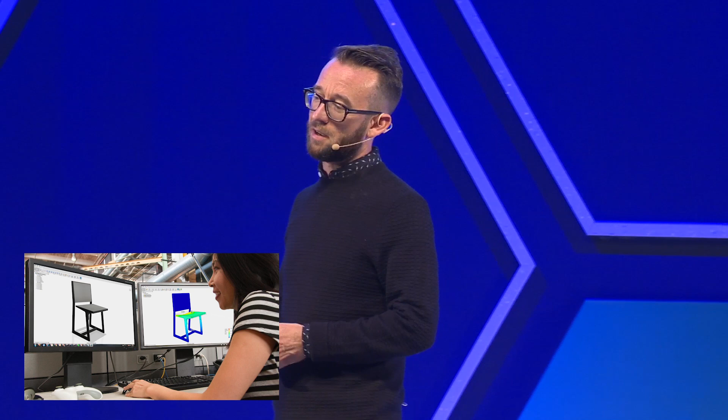Let's start by looking at how our design tools are being transformed by the cloud. When computation was finite, we made tools that you directed. You had to direct the tool. You drew the lines and arcs that described your idea.

You decided when to run simulation on a design to discover its performance. But now computation is abundant, we can flip the whole thing around. No longer simulating based on a design, and not just simulating during design, but simulating to discover the design.

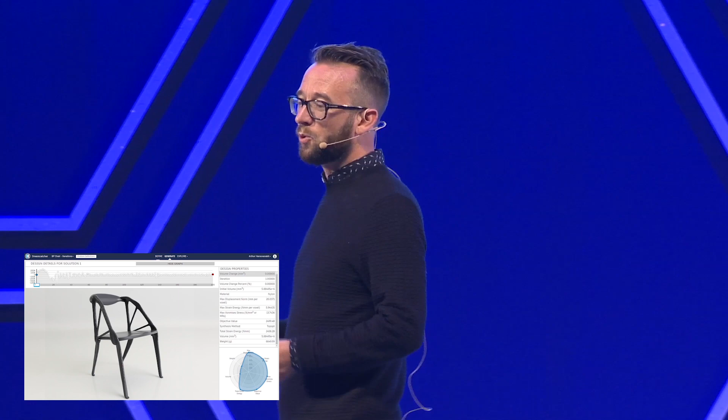With generative design, you just need to describe the problem, the goals and constraints, the forces at play, and the tool helps you discover what's possible. It uses abundant compute power to analyze the entire solution space, discovering designs you would never have come up with.

But generative design is also moving beyond just synthesizing geometry. It's starting to understand something infinitely more complex: the needs of people.

Our team in Toronto has moved into a new building, and so we're using it as a living experiment, an experiment to discover how we could maximize productivity and create a great environment for the people working there.

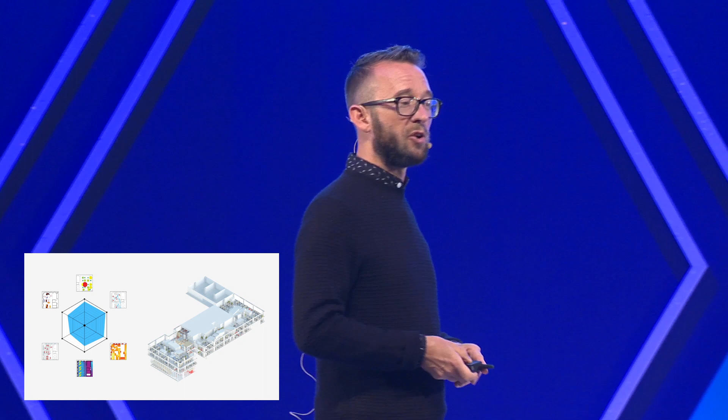So we use generative design, but rather than feeding it the forces affecting an individual part, we fed it the forces influencing human productivity. We surveyed our employees and captured their preferences and work habits.

The system then evaluated that survey data against a set of hard constraints: the boundaries of the building, the fixed locations of the stairwells, and so forth. And then it generated thousands of floor plans.

The system sought to minimize distractions, maximize outside views, prioritize personal relationships, and find an equitable solution to everyone's needs.

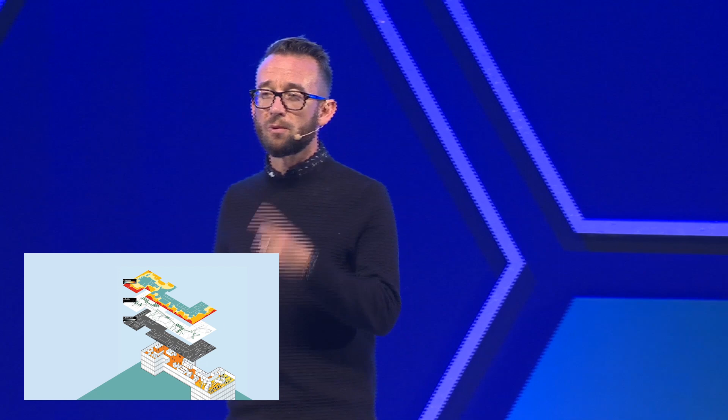We weren't just pushing cubicles around like Lego blocks, and we weren't just stuck with the first idea that worked. Our traditional design tools passively awaited our instruction. The relationship was purely directive.

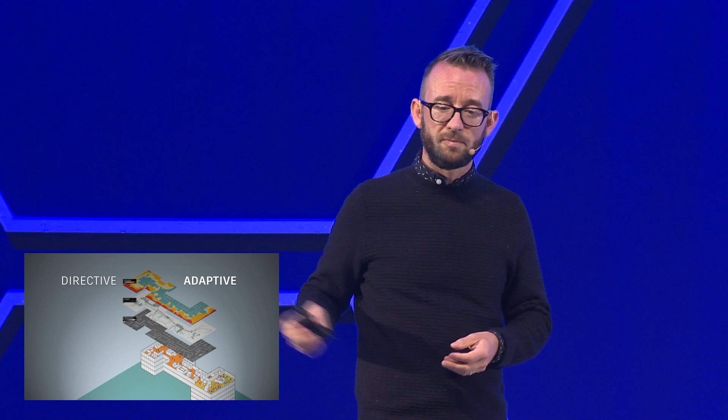We directed the tool. But this relationship has evolved into one that's adaptive. Our generative design tools anticipate our needs, and in doing so, help us discover the best design possible.

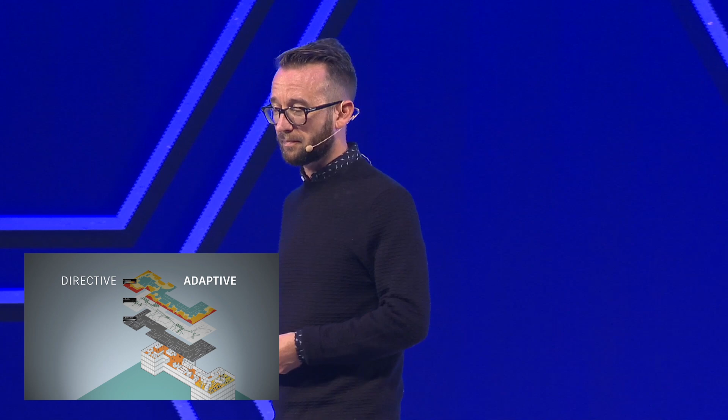And how about creating the things we design? Let's look at how the way we make things is being transformed by abundant compute power.

The physical capability of our robots hasn't changed drastically in decades, and nor has their environment. We still lock up our robots in the same old work cells. We do this to protect ourselves. These things move fast, weigh a ton, and have no way of seeing if we're in the way.

But we also lock down our processes to protect our investment. We all followed the Six Sigma thinking of the 80s, streamlining our manufacturing, making it as lean and efficient as possible. With our processes rigidly locked down, we balance the economic equation with volume.

But we can flip this equation on its head. Let me show you how.

Meet our robot, Ash. Ash is no different than other robots, apart from the fact that we don't keep her locked in a cell. We're exploring how we can give Ash the freedom to 3D print in metal all on her own. Ash doesn't rely on us for direction. Instead, Ash works as part of a closed-loop system to self-correct as she prints.

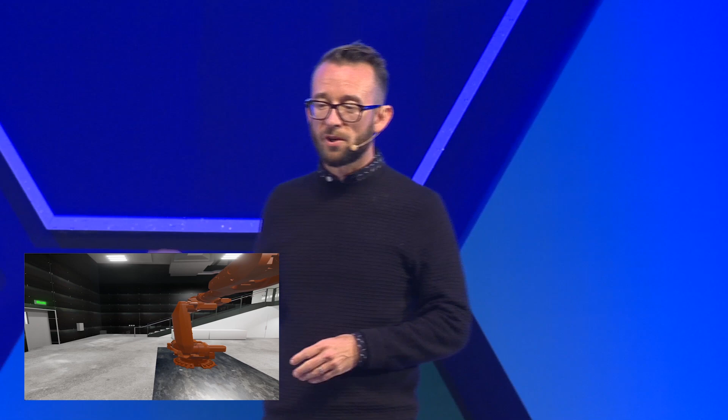As we build more capability into the capabilities of Ash, we need to build more flexibility into the way we work with her. By bringing Ash into a full-scale, real-time VR environment, we can step into her world and enjoy a closer relationship with her. We can interact with her intuitively and use our arms to manipulate hers, which means that the space she occupies is no longer such a barrier.

The way we work with robots no longer has to be so rigid, thanks to VR. And by giving our robots new capabilities, the way robots work with us becomes more fluid.

But when we printed the partition, we discovered how difficult it was to understand it. We couldn't see where the part might fail, even though the computer could. We could hold the component in our hands, but not in our heads.

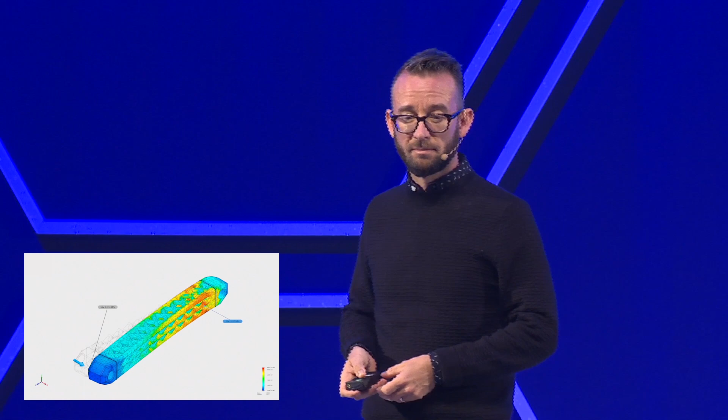Similarly, our traditional tools might be able to simulate this component, but the whole, our structures, once so inspectable, are fast becoming inscrutable.

Abundant computing is transforming the tools we use to design and make things. In turn, the very things we make are also becoming transformed by these tools. This partition embodies the evolutionary algorithms of generative design. This chair reflects just how far beyond our own limitations these tools can take us. And these floor plans reveal what's possible when we let go of our tool and let it direct us.

Data is increasingly driving our design decisions, and as we capture increasing amounts of data, our traditional tools can't scale, and neither can we.

Our tools and the things we make with them are turning into black boxes. But just because these black boxes are less inspectable, it doesn't make them any less capable. Far from it, in fact. The capability of modern machine learning techniques and the massive parallelism of the computing systems they run on are capable of solving ever bigger problems.

They're capable and reliable, more reliable than their over-engineered predecessors. Often more reliable than we are, in fact, at facial recognition, at cancer detection, and at driving.

Self-driving cars aren't built on if-then statements. They're built on insights. They don't run on formulas and functions. They're predictive, projective, and productive. Machine learning focuses on the principle of driving, not the formula.

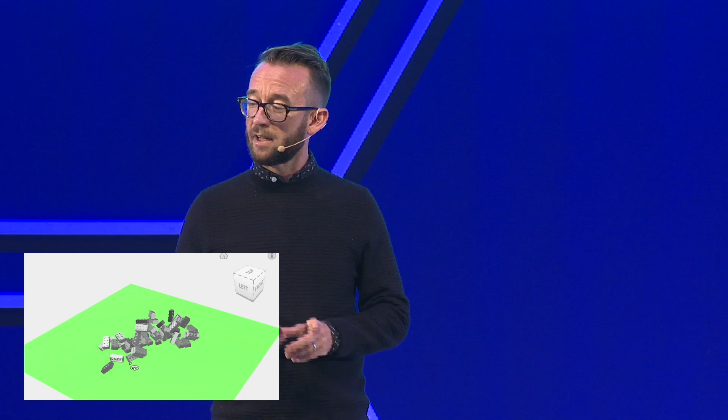And with the goal of learning how to assemble the pieces, we fed a neural network this view of what Bishop would see. By decoupling the learning environment from Bishop's physical environment, we also decoupled time. The computer could now learn in computer time, grabbing and assembling millions of blocks overnight.

And once this robot has learned the skill, the cloud means that all robots have learned it. And we can replace those Lego bricks with anything, so the robot can learn to grasp and assemble any object.

So rather than relying on conformity, we can instead embrace variability.

If a machine can learn how to build with Lego through observation, why can't a machine learn the behavior of the tools we all use in the same way? What if we used machine learning to cut through the complexity of something as challenging to master as Maya's fluid simulation tools? If Maya itself could learn these settings, perhaps by manipulating each slider, dial, and drop down, and correlate these to the resulting rendered image, then it could do what visual effects artists do all the time. It could look at the reference photography and use its intuition to infer the settings needed to recreate the effect digitally.

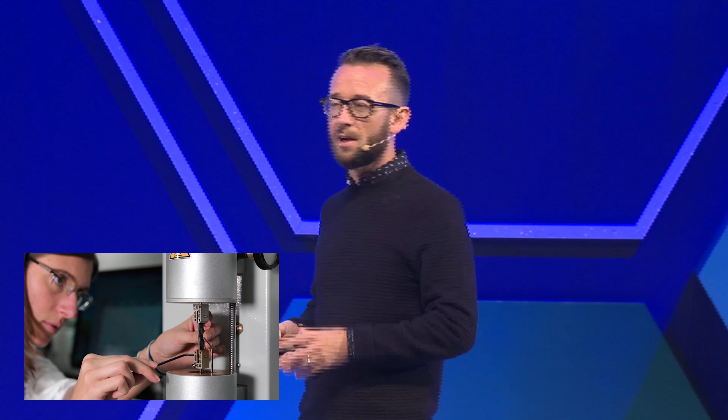Let's move from visual effects to how we're investigating how to make Moldflow a more insightful simulation tool. The 10,000 materials in the Moldflow materials database represent 30 years of data, all acquired by slow physical testing. And yet, two-thirds of the materials in the Moldflow database still don't have complete properties. Through physical testing, we'll never finish. But machine learning can help us scale.

We can take the materials we do know and use them to predict those we don't yet know. We can't characterize across 10,000 items, but a neural network can. We're using such a network to extrapolate the data and complete the library for all 10,000 materials. And because this happens in computer time rather than human time, we won't have to wait years for that data to be complete.

The best simulation code is effectively a model that calculates real-world performance. But by teaching an AI, by subjecting it to many inputs, we enable it to work not by calculation, but by intuition.

Let's move from simulation to finish on how machine learning is transforming our tools for construction. Project IQ fits into the BIM 360 family. Real-world data for construction is at the center of IQ: 27 million documented issues from 10 years of BIM field data. IQ takes this data and uses machine learning to predict high-risk issues, project subcontractor risk, and keep superintendents productive.

The supers at Swinerton Construction use IQ to check potential risks on projects, just like they check the weather forecast. We started by automating classification of the construction issues from the descriptions typed on site. It's like autocomplete for the construction site.